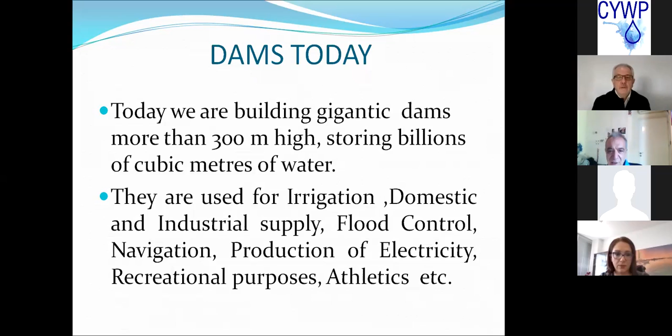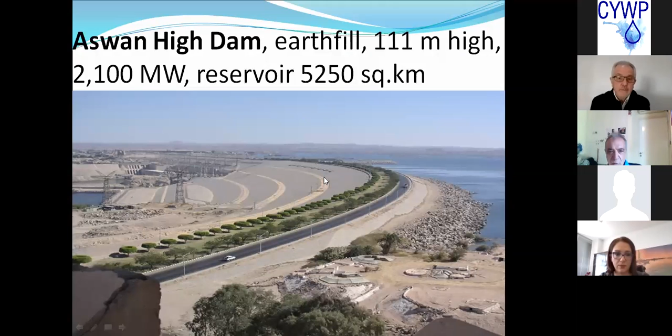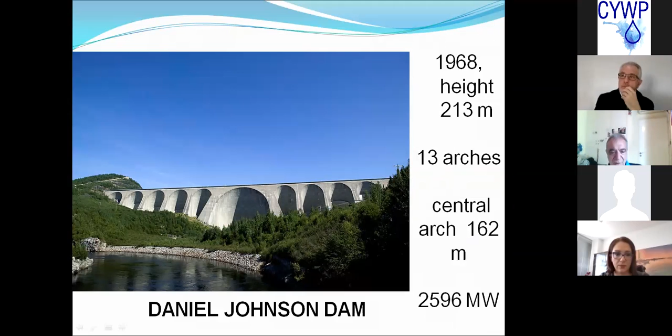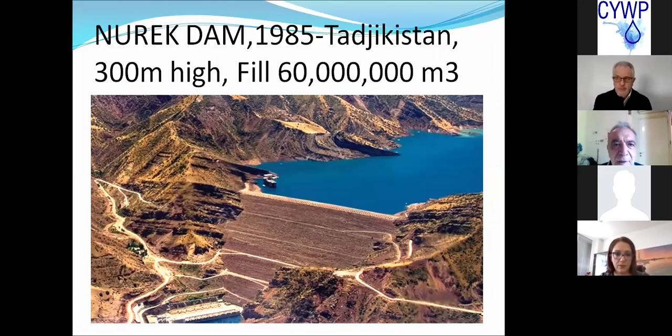This was the highest dam in the world for about 30 years, Nurek Dam, with a total fill of 60 million cubic meters. And this was surpassed by this dam here. I'm trying to get rid of some of these. This is Nurek Dam in Tajikistan, which is 300 meters high with a fill of 60 million cubic meters. This is, I've got a problem here with the screen.

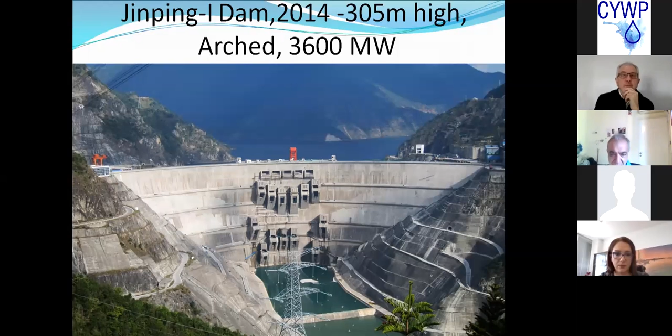Dam safety. As you understand, a large number of dams are located upstream of large cities, like the Aswan Dam, which is upstream of Cairo, and Folsom Dam, which is upstream of the city of Sacramento in California. So the safe operation of dams depends on many factors: design, construction, monitoring, maintenance. Dams do not become safer with time. We have a phrase in Cyprus that is wrong. The dam does not become safer with time, so it needs frequent inspection.

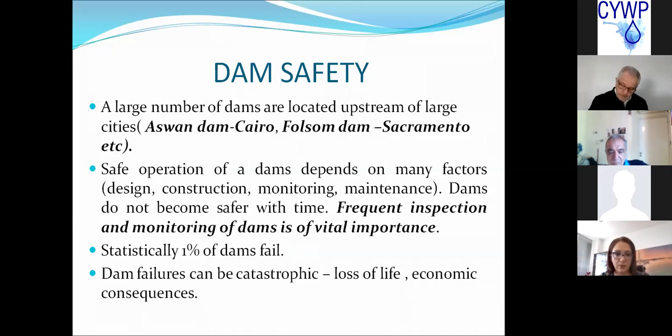Statistically, 1% of dams fail. Dam failures can be catastrophic, with loss of life and serious economic consequences. And I have a list of some dam failures here. The Malpasset Dam in France in 1959 killed 421 people. The Vajont Dam in Italy, 1963, killed 2,600 people.

The Canyon Lake, it's a very small dam in America, South Dakota, 1972. It was only 6 meters high, but it killed 242 people and destroyed half of the city. The famous Teton Dam failure in 1976. And we've got some really major dam failures in India and China. The Machchhu dam in India, approximately 5,000 people died, and 2 dams collapsed in China in 1975, killing 171,000 people.

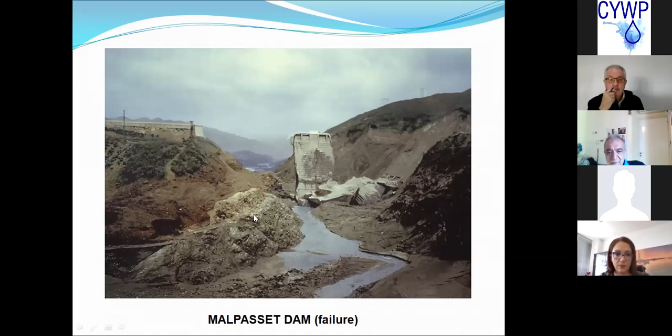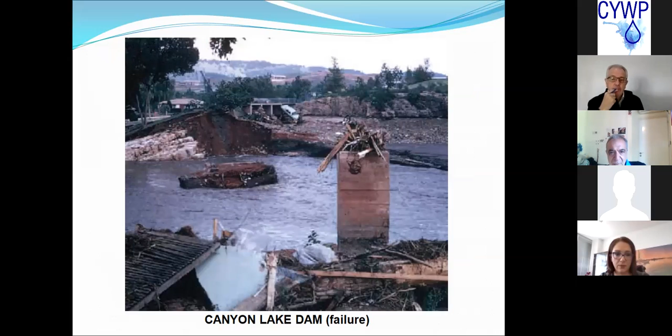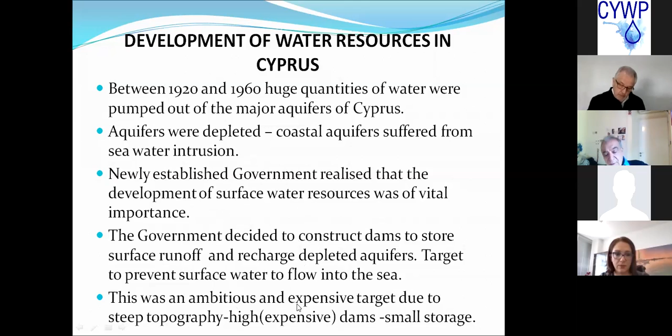Coming back to Cyprus, between 1920 and 1960, Cypriots were using the aquifers. They were pumping huge quantities of water from the aquifers. The aquifers were depleted. The coastal aquifers suffered from seawater intrusion. The newly established government realized that the development of surface water resources was of vital importance. The government decided to construct dams to store surface runoff and recharge depleted aquifers. The target was to prevent surface water from flowing into the sea. This was an ambitious and expensive target due to steep topography, because our dams are very high compared to their capacity.

In 1960, we had 6 small dams with a total capacity of 6 million cubic meters. In the early 60s, a number of medium-sized dams were built for irrigation purposes, and these were mainly earth-filled dams built with locally available materials, and these include Pomos, Agia Marina, and Argaka in the northwestern part of Cyprus, Mavrokolymbos in Paphos, and Polemidia upstream of the town of Limassol. They varied between 33 and 45 meters, and storage between 300,000 and 3.4 million cubic meters.

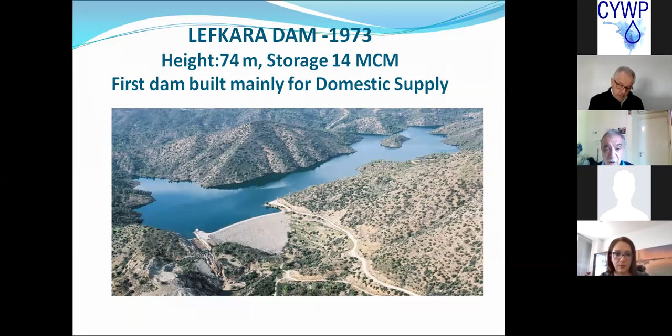This is the first dam with a capacity of more than 10 million cubic meters, the Germasogeia Dam. This is the first dam we built in Cyprus which was intended for the domestic supply of the city of Famagusta, the Lefkara Dam.

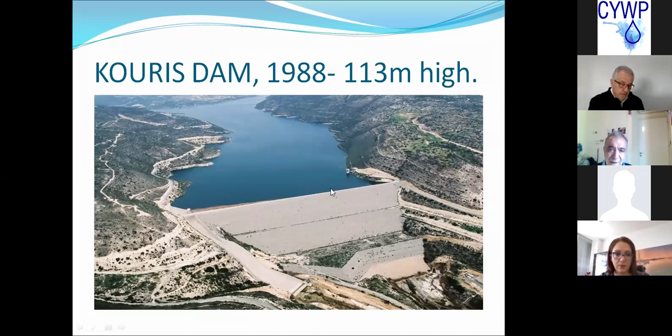And then after the invasion, the government decided to implement 5 major projects: Paphos Irrigation, Vasilikos Pentaschinos, Pitsilia Integrated Rural Development Project, Chrysochou Irrigation Project, and the Southern Conveyor. Obviously, large dams form the key components of those projects, and these include Asprokremmos Dam, Dipotamos, Kalavasos, Xyliatos, Evretou, Arminou, Kouris, Achna. This is the highest dam in Cyprus, with a height of 113 meters, capacity 115 million. This graph here shows the dam construction progress in Cyprus, and you can see that between 1980 and 1990, we've added 230 million cubic meters of capacity to our dams.

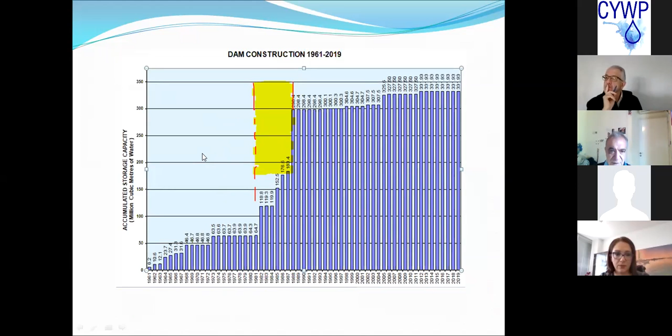Dam safety in Cyprus now. Most of the large dams in Cyprus belong to the Water Development Department, and some smaller dams belong to local irrigation divisions. Towards the end of the intense dam construction activity around 1990, it became obvious that systematic dam safety procedures had to be established. For many years, dam safety issues, inspections, instrumentation monitoring, etc., were addressed by the experienced engineers of WDD in collaboration with the consultants, because the consultants were mainly here, some of them finishing their projects, some of them not. So all this work was being carried out by the engineers of the Water Development Department.

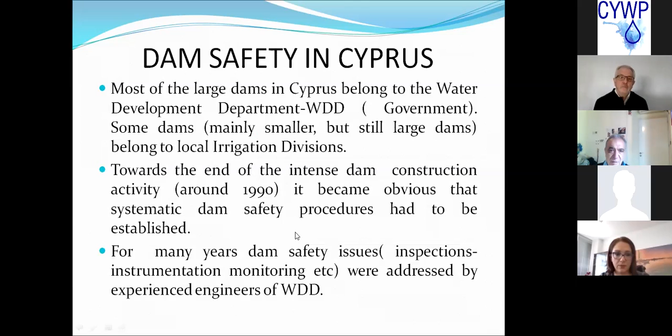So the Integrated Water Management Law, this is a law that was passed in 2010 after lengthy and laborious discussions, objections, and disagreements. There are provisions in the law for the safety of dams. We've got articles 56 to 79. These provisions are based on the Reservoirs Act of 1975 of the UK. Obviously, we have adapted the Reservoirs Act to suit the local conditions.

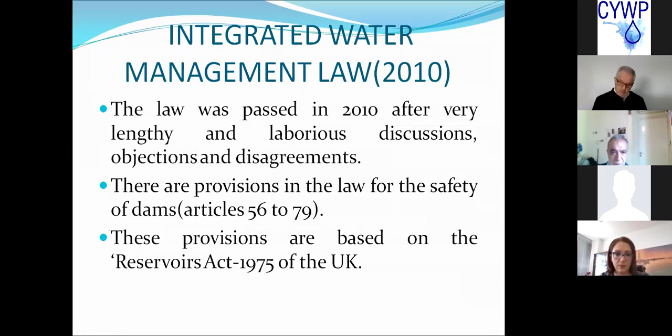So, similar to the UK Act, a large raised reservoir is a reservoir capable of storing more than 25,000 cubic meters of water above the natural ground level. The law covers all large raised reservoirs, whether constructed under the provisions of the law or not, i.e. those storing fresh water, recycled water, sewage, and liquid waste.

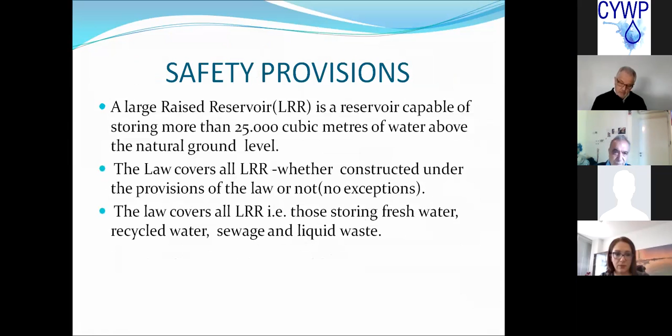The director of WDD ensures that all dam undertakers, those that are running the dams, including the director of the Water Development Department himself, comply with the provisions of the law. The director of WDD maintains a register of all large dams in Cyprus, with details about each dam, basically.

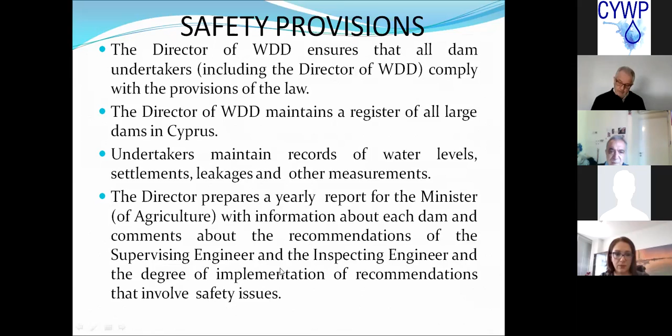Undertakers maintain records of water levels, settlements, leakages, and other instrumentation measurements. They keep proper records, which they have to communicate to the director of the Water Development Department. The director prepares a yearly report for the Minister of Agriculture with information about each dam and comments about the recommendations of the supervising engineer and the inspecting engineer, and the degree of implementation of the recommendations that involve safety issues. We will see in a minute what we mean by supervising engineer and inspecting engineer.

For this purpose, the ministry maintains a panel of qualified engineers, i.e. we've got 3 categories: the supervising engineers, the construction engineers, and the inspection engineers referees. The registration can be done by application to the director and approval of the Minister of Agriculture. Panel engineers must be employed for nearly all major activities involving dams.

In the case of construction of a dam, enlargement, reuse of a dam, a construction engineer must be employed for the design, supervision, and issue of certificates. This is very important. Not just do the design, but he has to supervise it and issue the appropriate certificates.

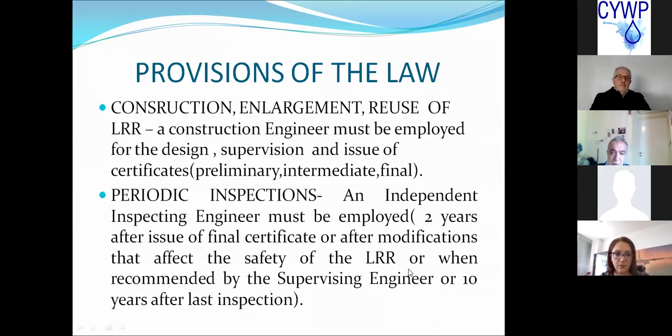Periodic inspections. An independent inspecting engineer must be employed 2 years after issue of the final certificate for every dam, and after modifications that affect the safety of the dam, or when recommended by the supervising engineer, or 10 years after the last inspection.

Supervision of a dam. When a dam is not under the responsibility of the construction engineer, in other words, it's finished, a supervising engineer must be employed to supervise the dam and give updated information to the undertakers regarding the behavior of the dam and the issues that may affect its safety, and ensure that they comply with the provisions of the law. They have to have somebody, a qualified engineer, to supervise the dam and go and visit them, check the instrumentation, and report to them whether there are any issues that involve safety.

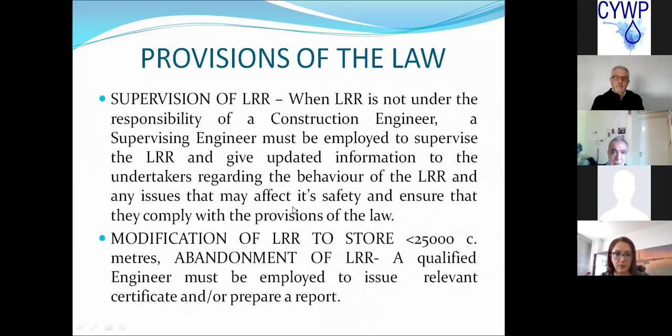If we modify a dam to store less than 25,000 cubic meters of water, or if we abandon a dam, a qualified engineer must be employed to issue the relevant certificate and/or prepare a report. The director of the Water Development Department has got some extraordinary powers. If the undertakers of a dam fail to employ a qualified engineer when instructed by the director under the provisions of the law, then a qualified engineer can be appointed by the director.

If the undertakers of a dam fail to implement a recommendation relating to the safety of the dam, the director may implement the recommendation by employing a qualified engineer himself. If the director considers that a dam is unsafe, he can take any appropriate action. All expenses are paid by the undertakers.

In case the undertakers, the users of the dam, in other words, disagree with the implementation of measures recommended by the supervising engineer, the inspecting engineer, an arbitrator must be appointed. In case of disagreement, the arbitrator can be appointed by the Council of Ministers. Reports by arbitrators, construction engineers, supervising engineers with recommendations must be communicated to the director.

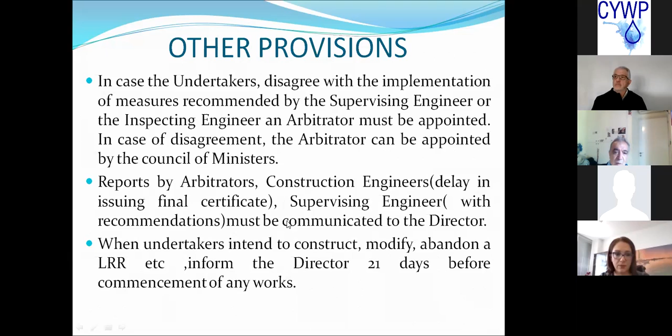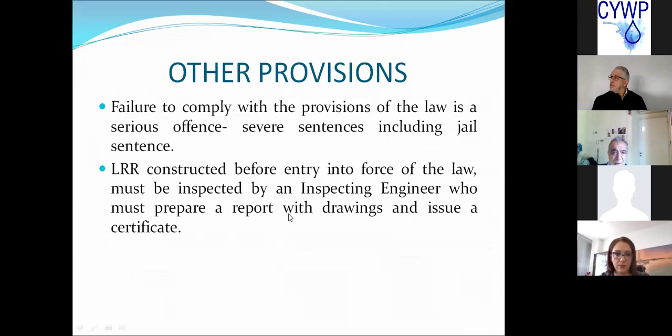When the undertakers intend to construct, modify, or abandon a dam, they inform the director 21 days before commencement of any works. Other provisions: failure to comply with the provisions of the law is a very serious offense, and there are severe sentences, including jail sentence. Dams constructed before entry into force of the law must be inspected by an inspecting engineer, who is going to prepare a report with drawings and issue a certificate.

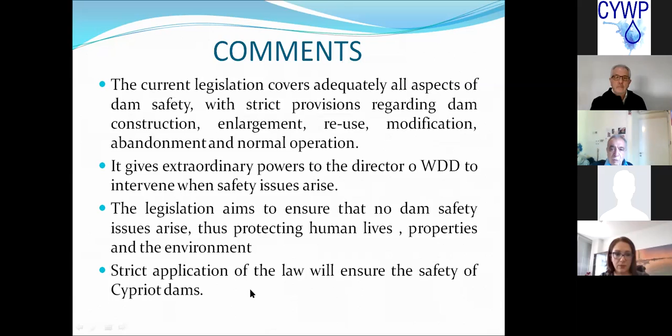My final comment is that the current legislation covers adequately all aspects of dam safety, with strict provisions regarding dam construction, enlargement, reuse, modification, abandonment, and normal operation. It gives extraordinary powers to the director of the Water Development Department to intervene when safety issues arise. The legislation aims to ensure that no dam safety issues arise, thus protecting human lives, properties, and the environment. Strict application of the law will ensure the safety of Cypriot dams.

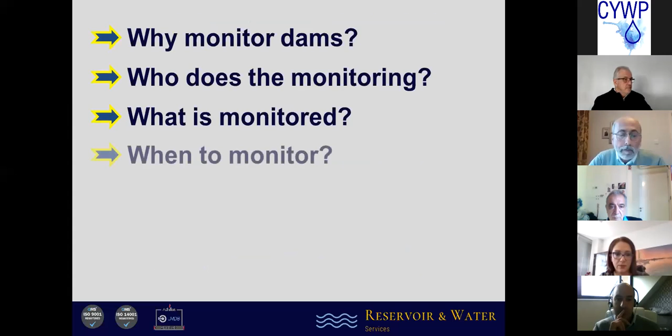But it's fair to say that each country's legislation differs slightly in some respect, but they all share a common ancestry that goes back to 1930, following a couple of major dam failures with loss of life. And they all have requirements that are very similar for the topics that we're going to cover in this presentation. We will cover these topics, and our aim is to illustrate typical monitoring practices here in the UK, who does that monitoring, and the legal framework that stipulates what needs to be done.

It might be useful quickly to provide a comparison of terminology between Cyprus and the UK. In England, the operator of a reservoir, which is not necessarily the owner of the reservoir, is termed the undertaker. I understand that you might also use the word operator as well as undertaker. I'm going to use both in this, just to avoid any doubt. They both mean the same thing.

You have 3 classes of engineer. Category 1 being the supervising engineer, category 2 being the construction engineer, and category 3 the inspecting engineer. In the UK, we have supervising engineers and inspecting engineers, but the inspecting engineer can also undertake the role of construction engineer, whereas the supervising engineer cannot.

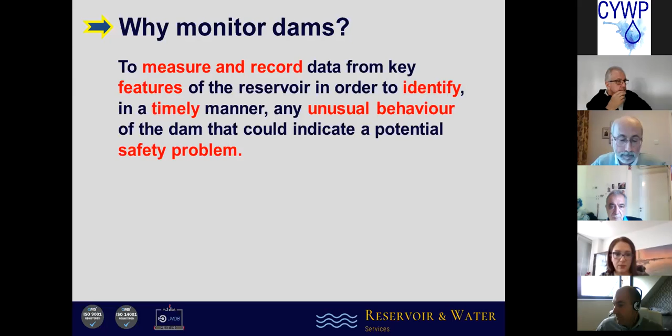So, getting into monitoring of dams and the equipment associated with the control and management of water into and out of the reservoir. This is vital to understanding whether the reservoir and equipment perform as expected and to provide long-term data that enable unusual trends in the behaviour of the dam to be identified in a timely manner to avoid safety problems, basically. It's a legal duty in the UK to perform monitoring and maintain records, and the same now applies in Cyprus. And this was touched upon in a previous paper.

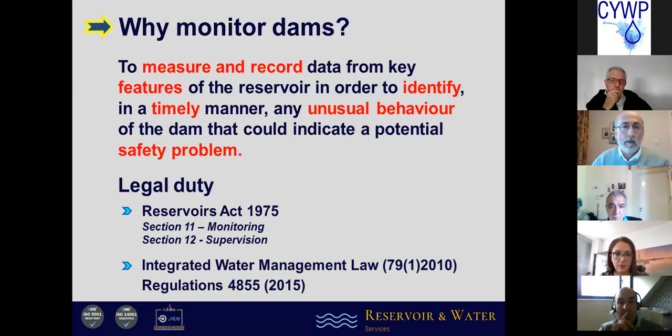Monitoring is performed by the reservoir undertaker. Some monitoring is conducted for operational purposes and also to record the performance of the structure of the dam and its fixtures such as valves, gates, weirs, etc.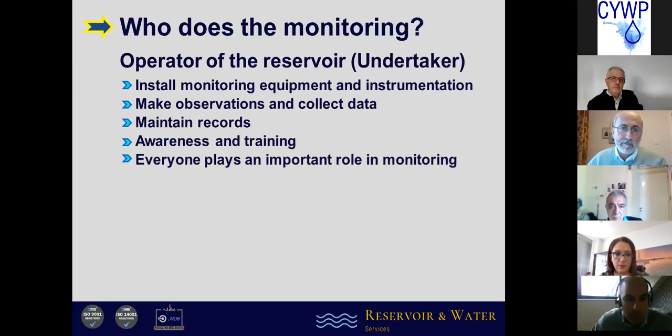The supervising engineer is obliged to ensure that the operator keeps records of the monitoring and also to assess the data from that monitoring to identify if there are any unexpected or unusual trends in the data. So, for example, has the dam settled more than would be expected from the design calculations? The supervising engineer is required to include a section in the annual report that is produced about the reservoir.

And about the operator's monitoring and an assessment of that data. That report has to be sent to both the reservoir operator and to the enforcement authority, which in England is undertaken by the Department for Environment, Food and Rural Affairs. Bit of a mouthful, normally called DEFRA. It's one of the major departments within the government.

They review the legal performance of the undertakers to make sure that they are complying with all of the regulations and they are not slow in using their enforcement powers to seek prosecution where things aren't done how they should be.

Recent change to the law in England has given a new power to supervising engineers, enabling them to issue instructions to the operators of reservoirs to conduct additional or new monitoring where it's believed that there could be an issue with the dam that might affect its safety and for which the monitoring is required.

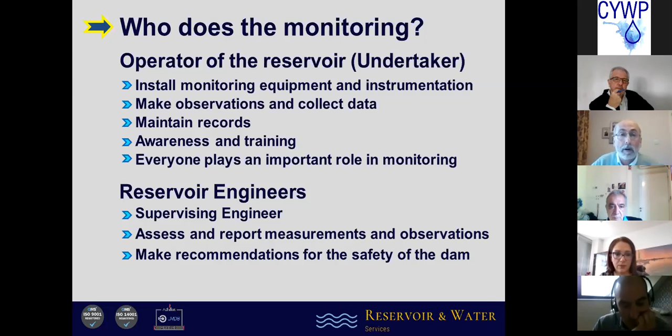The construction and inspecting engineers will usually recommend what is to be monitored and at what frequency. The operator of a dam has a legal duty to follow those instructions, as does the supervising engineer to review the data collected and to report upon it. The undertaker is often able to select the methods of monitoring and the equipment to be used.

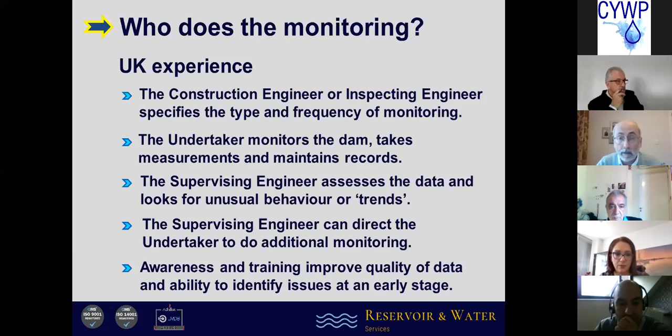In my experience as a supervising engineer, it is always a good idea to inform those who will actually do the monitoring why it and they are so important, as it is those people who will see the reservoir, the dam, more often than most other staff, and they provide an ideal means of observing anything unusual and then reporting it quickly to catch problems before they develop too far.

So, what is monitored? There are two main aspects of a reservoir where monitoring is required in relation to the safety of the dam. Things are associated with the water being stored and the dam itself and all its fittings. From a dam safety perspective, the normal parameters to be measured include the water level, discharge from the dam, as well as on occasions the inflow to it, although that is normally only used at non-impounding reservoirs where the water is pumped into the storage reservoir.

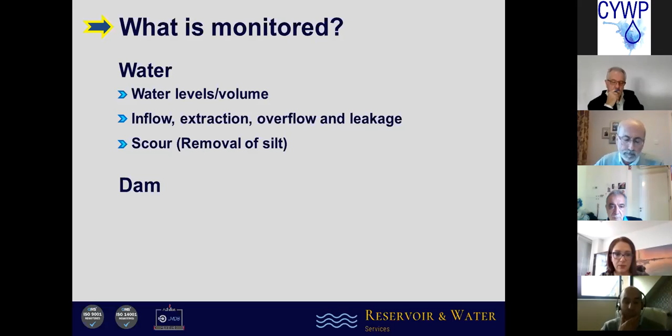The chemical and biological aspects of water are often measured, but these are normally only relevant for water quality purposes in water supply reservoirs and not so much used for dam safety purposes. In terms of monitoring the dam itself and its various elements, the monitoring normally focuses on movement and condition. Has anything moved more than expected? Typically settlement or deformation of embankments? Is the condition of fittings adequate and do they operate as required? Absolutely critical, that one. Different methods are employed to monitor each of these, and we shall now explore some of the more typical methods that are used in the UK.

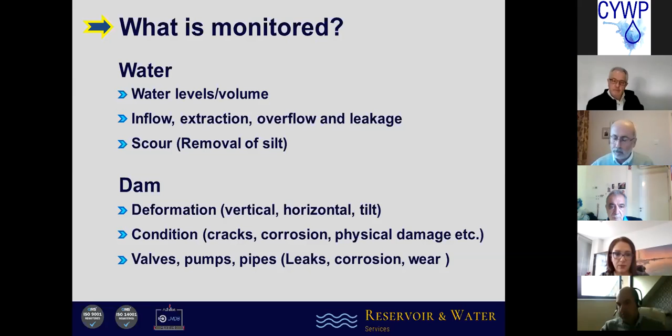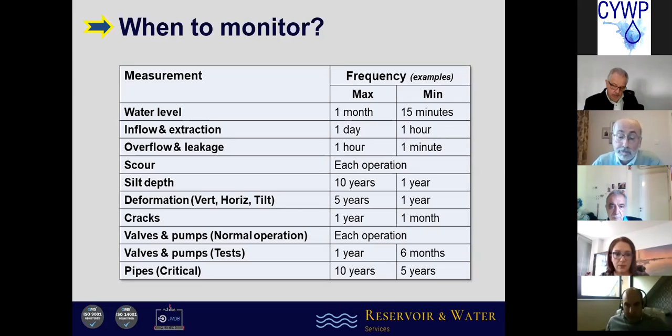It's often possible to reduce the frequency of monitoring after a dam is built or altered when its performance has been shown to follow predictable trends, but equally importantly, to increase those frequencies when unusual trends are observed.

We're getting on to how we conduct monitoring here in the UK. Looking at some of the typical measurements and starting with water level, the three common methods used include visual observations using a gauge board, which obviously needs somebody to go and have a look at it, or using digital methods. The typical ones we use are ultrasonic methods made from above the water by reflecting a signal off the water surface to measure the distance down to the water, or by using submerged pressure sensors under the water that measure the depth of water above the sensor.

The advantage with the digital methods is that they can be linked via telemetry and have automatic alarms included within that telemetry so that notifications are sent to key personnel advising them of sudden or unexpected rises or drops in water level.

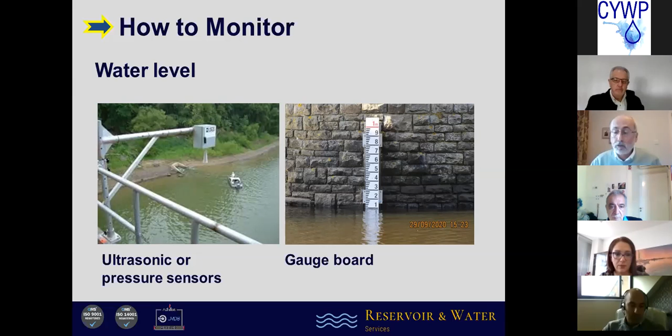Another very common and growing practice in monitoring is the use of remote CCTV, again linked by telemetry, with cameras provided to look at key components of the dam: valves, weirs, spillways, etc. These need to operate 24 hours a day, and having an infrared lighting facility built in is a very useful

feature to include. One interesting recent development on that is if you are using infrared, just remember it cannot see anything that is red. So don't paint valve handles or have red numbers on your gauge boards because it can't see them. Black is good, or any dark colour. But be aware, these can be prone to vandal damage, and we also suffer from the mess that birds tend to leave on them. They like to perch on these things.

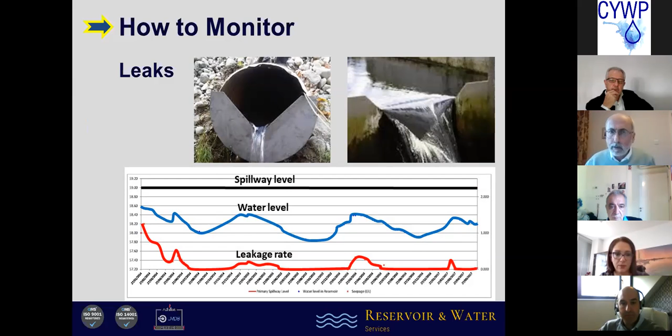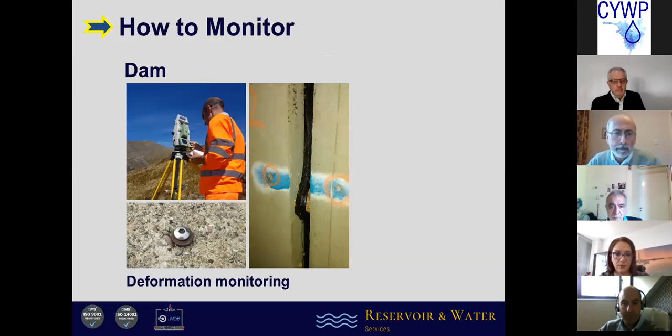Monitoring movement of the dam or its deformation requires precision measurements. The frequency of those measurements can vary, as I've mentioned before. It's normal practice here to measure the deformation of dams every 2 or 3 years, sometimes less than that, using permanent reference stations, such as the pin that you can see in that bottom left image, fixed to key components of the dam and its structures.

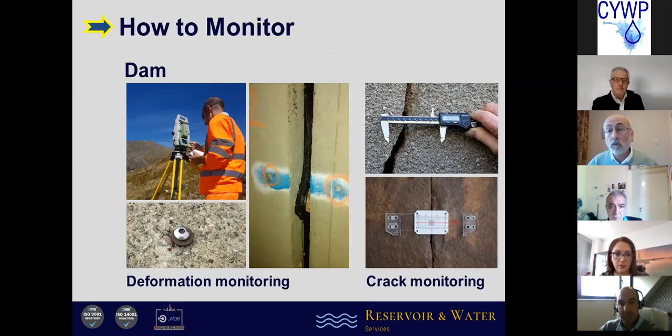Crack monitoring is usually conducted more frequently. Measurements will be made even more frequently when any unexpected movement occurs. Cracks can widen and close up. Again, the longer term monitoring will show whether or not this is normal or exceptional behaviour.

It's a duty of the supervising engineer to assess the monitoring data to see if there has been an unexpected trend in the data. The undertaker can do this as well for their own benefit, but the duty rests with the supervising engineer to make that assessment and to assist the undertaker in understanding what is going on with their dam.

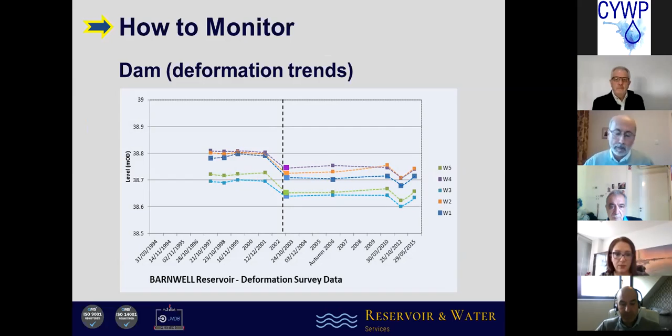Settlement of embankment dams is nearly always monitored due to expected consolidation and settlement. They will be expected to settle, but heave or rebound, as we call it, can occur with fluctuating water level. So having a long-term data set of monitoring measurements becomes important in being able to differentiate between these and any unexpected movements.

Siltation is a problem in many reservoirs, and the operation of scour valves to flush away silt where it's collected behind the dam is nearly always recommended by inspecting engineers to be conducted typically at least once every year. So the valve is operated over its full range until water runs clear and the silt around the valve has been flushed away.

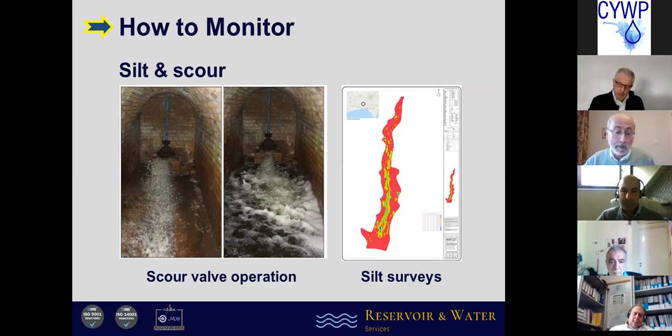Monitoring where silt has been deposited is becoming more commonplace as dams get older and more silt is being brought into the reservoir, as this reduces the volume of stored water, which can have economic or supply consequences. Different methods can be used to measure the silt, which Tom will touch on now as I hand over to him to look at some of the practical monitoring methods that we commonly see across the UK. Over to you, Tom. Thanks, Neil.

Neil's covered some of the importance of monitoring, and now I thought it would be good to cover how we complete some of these tasks and the type of surveys that we actually undertake. Many people will be familiar with traditional topographical surveys, which provide accurate 3D points, plotting the location of the features based on individual survey points. For large areas now, we can use UAVs or drones to capture a much higher density of data, and to be honest, in a fraction of the time. This will create a ground terrain model and can be used for more than just standard topographical surveys.

Neil mentioned deformation monitoring. These surveys are typically used for monitoring movement of structures such as dam crests, walls or tunnels. Monitoring is repeated at regular intervals and is achieved using precise total stations or digital levels, all referenced back to known static benchmark readings. Typically, sub-millimeter measurements are required, and it's certainly achievable when undertaken in the correct way. Next slide, Neil.

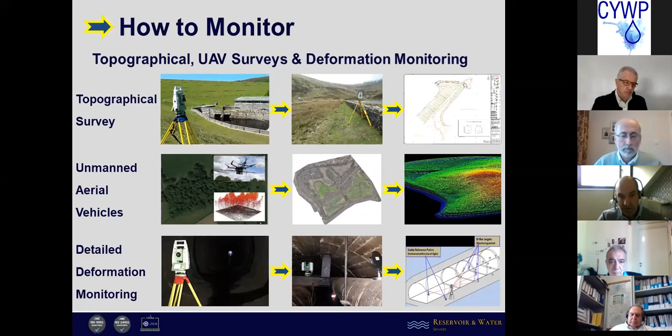A great way to capture a full three-dimensional profile of a structure is to complete what we do, the 3D point cloud surveys known as 3D laser scans. These also provide high definition, 360-degree photos throughout the survey. With very tight data registration, accuracies of between 3 to 4 mil are certainly achievable in this type of survey. And this survey is typically used to provide a full record of valves, pipework, connections, cracks, displacements.

Once scanned, any measurement and photographic evidence can be taken, and if needed, repetitive surveys can be completed to monitor any change. 3D point cloud surveys are fantastic and regularly used prior to starting any projects where engineers can visualize all aspects of the structure. They can take measurements of everything or anything, including very small detail like the size of bolts, which can aid the design process.

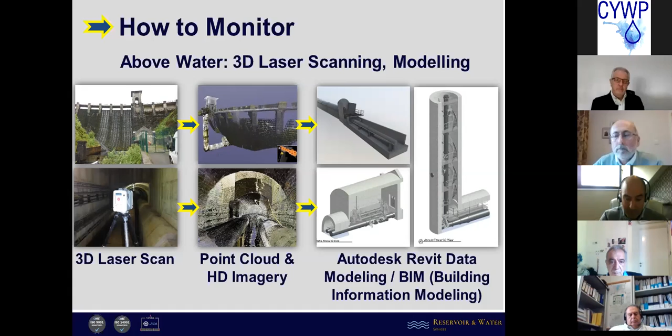The pictures on the right contain sections from model data. This is often known as BIM or Building Information Modeling, which provides a very easy visual means to view the data from the point cloud dataset. Right, now moving on to our more sort of favourite type of surveys.

This equipment can be put on board a boat or attached to even remote control boats, and requires a lot of backwards and forwards movements across the water to build up a full picture of the bed profile. Detailed contour drawings of bed levels and top of silt, etc. can be provided, which then give you quantities of silt and water at different depths.

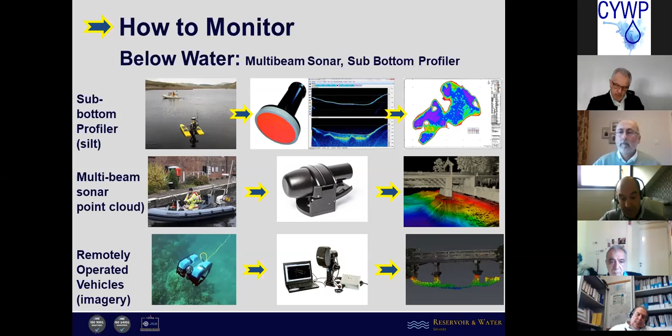Neil, I'll pass it back to you now. Thank you, Tom.

Our legislation in the UK is supplemented by a guide in which the legal content and the recommended format of the records is recorded. This is to give the undertaker of the reservoir the means by which to actually collect and then store those measurements that are to be legally gathered and retained, and then assessed by the supervising engineer.

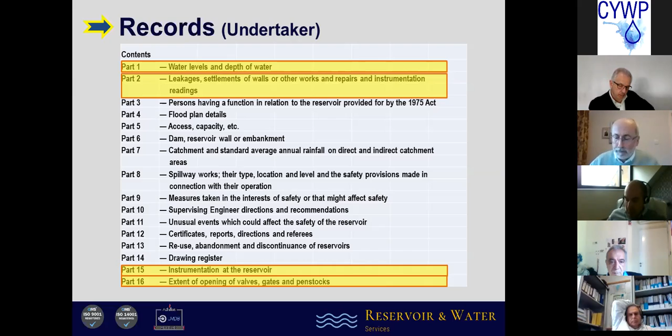The guide also describes the prescribed contents of this annual report by the supervising engineer, the 10-yearly report by the inspecting engineer, and the certificates to be issued by the inspecting and construction engineers. So it's a very useful guide, very comprehensive, and it's revised at fairly regular intervals.

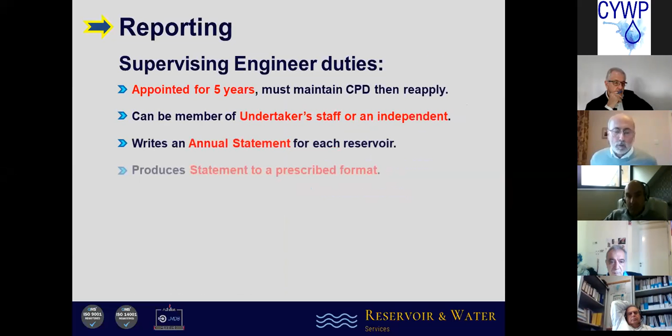The supervising engineer has to satisfy specific requirements before qualification. But I'm moving on here to explain how the supervising engineer's role in monitoring the data is critical, and how selection and approval of supervising engineers needs to include evidence from the applicants that they fully appreciate how monitoring is such a vital role of their future duties.

They have to satisfy specific requirements before qualification onto the panel of supervising engineers. And once they qualify, unlike a doctor who's a doctor for life, a supervising engineer only has a 5-year period of qualification before they then need to reapply. They have various legal duties when appointed to supervise the reservoir.

The appointment to look after a reservoir is made by the undertaker, and the undertaker can select anyone from that approved panel of supervising engineers, but normally makes the selection based on the engineer's familiarity with the type of dam. So somebody who has no experience of concrete arch dams would not be chosen. Conversely, somebody who has no idea about earth embankment dams would not be selected to look at an earth dam.

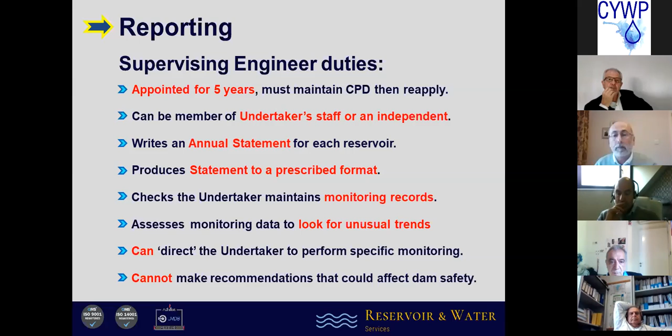They're also chosen on their proximity to where the dam is, in case there are incidents, and the time that it takes for them to get there. As an illustration, an inspecting engineer, which can also be the construction engineer here in the UK, has more legal authority than the supervising engineer, but again is very focused on the monitoring aspect of their duty. But as with the supervising engineer, also only has a 5-year period before needing to reapply.

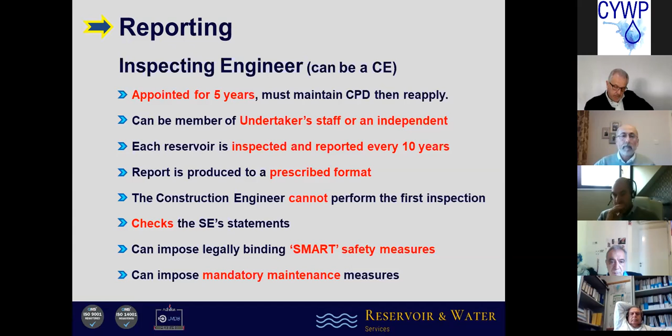So that concludes this presentation. I hope that's been of use, and I understand we'll now go into a period of any questions. Thank you. Many thanks, Neil and Tom, for this extremely detailed and valuable presentation with regard to effective monitoring and the legislative framework that is applied in the UK.

Any questions at the moment? I don't see any questions in the chat box. So, Neil, during your presentation I made some notes, and perhaps I would ask to start with emergency plans in the case of an incident. Is it the responsibility of the operator, or in the case of the UK, the undertaker, to prepare this, and do these plans have to be approved by some authority?

Very good and very timely question, Boss. The next presentation will actually touch on some of the problems that can occur, and probably most of you, if not everybody involved in the webinar, might be familiar with a fairly major incident that happened here in the UK last year at the Toddbrook Reservoir. Probably very familiar and memorable because of the use of Chinook helicopters to deliver big bags of ballast to try and support a failing spillway.

When a reservoir is constructed, the construction engineer who oversees the design and the construction phases issues certificates, as is the case over on Cyprus. And what is common practice here is at the end of that period, what's called an operation and maintenance manual is also created, normally by the designer of the dam. And this is for use specifically by the undertaker, by the operator of the reservoir going forwards.

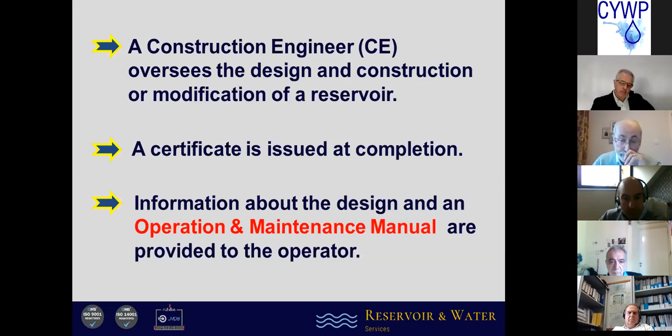It gives details of the ways in which the reservoir should be operated, the equipment involved, so all the valves, weirs, etc., and how the dam and all the equipment should be maintained until such time as the inspecting engineer comes along, 2 years after the dam is built, and then at 10 yearly intervals, when they can issue additional recommendations or advice as regards operational maintenance and monitoring to be undertaken.

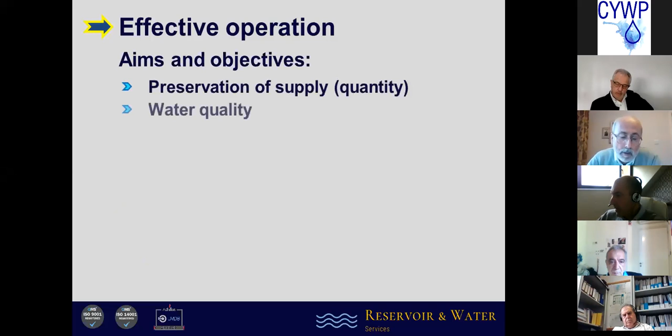Effective operation of a reservoir should be ensured by detailed written instructions and procedures put into effect by staff who are well trained. Those are very good aims and objectives seen here. The procedures normally cover actions that are designed to ensure that the reservoir can supply the required quantity of water of a suitable quality for treatment and then distribution, or for irrigation purposes.

It's fair to say we also have many reservoirs in the UK that we call amenity reservoirs, which were usually built to improve the appearance of large country estates. People who had more money than they knew what to do with and wanted to look out of the windows at something that looked very good. These have their own particular problems, and their operators don't always devote sufficient effort to their maintenance.

We also have a great number of what are called flood storage reservoirs that are normally empty, but can fill very rapidly in storm conditions and are designed to protect property or critical assets downstream. These have slightly different operating procedures, and the staff involved with operating them need special training.

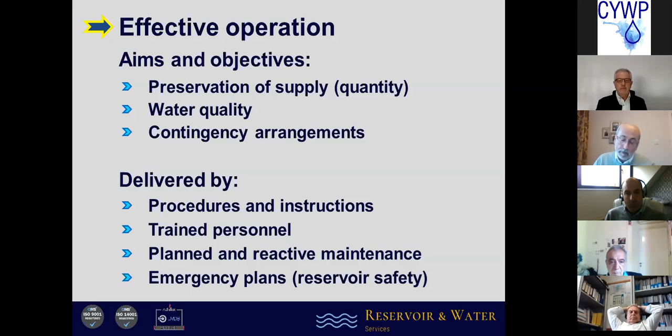The plans, as I've just mentioned, describe what actions should be put into place to operate the reservoir to try and mitigate damage and the catastrophic release of water through the dam. And these can be tested with the supervising engineer to prepare the undertaker's staff in advance of a real event and to identify gaps or omissions in the procedures.

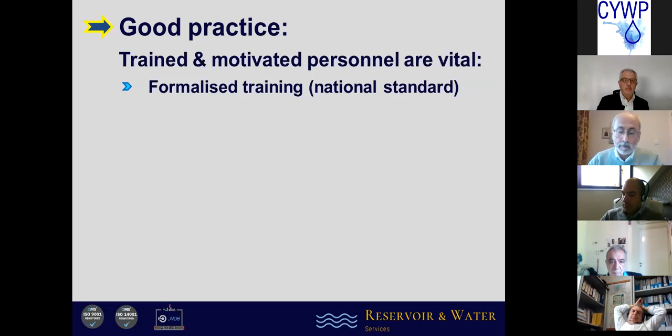So looking at what do we consider to be good practice? Training of the staff that operate reservoirs is something that is, in my opinion, not given the priority it requires. I've found that well-informed staff, when they do get training and time is taken to involve them in how the reservoir operates and what it's for, they take pride in their work. Once they appreciate how important their role is, it makes them feel better and trusted and valued by their employer.

One way to do this that I've found definitely works is to provide awareness sessions to staff who undertake completely different roles, whether they're key high-level management, right the way down to the guy that greases the valves and takes the readings from monitoring equipment. Everybody is important and plays vital roles, and understanding where they fit within that structure should not be overlooked.

Having written procedures on how to operate the reservoir, as I've already mentioned, is very important. Defining roles and responsibilities for everybody involved in that process is also essential, and they are made more effective when those procedures are reviewed regularly. It's no use having them in a folder kept on a shelf collecting dust. They've got to be looked at on a very frequent basis.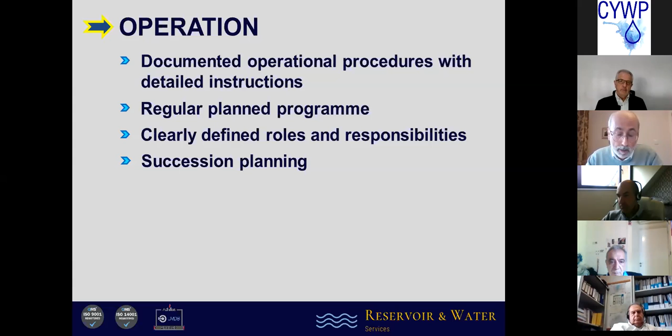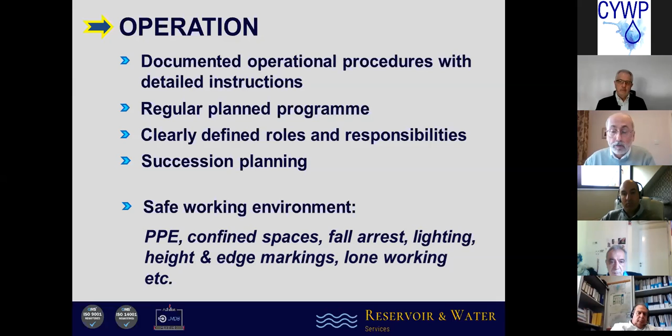And something we take very seriously is provision of safe working environments with attention to the details described here, which help to reduce accidents, but also raise morale and productivity, and should never be overlooked. We have many forms of legislation here looking specifically at health and safety, and they all relate to reservoir work, and some specifically, such as confined spaces going inside dams, are very robustly enforced over here.

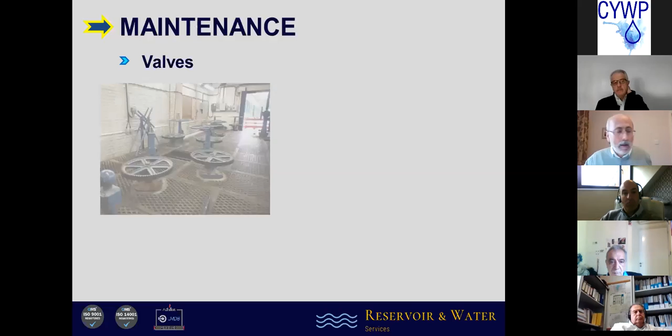Looking at some of the key components and how to operate and maintain them: valves. Valves need a lot of attention to make sure they continue to operate properly. They're highly stressed assets working in a hostile environment and need regular operation to keep them working properly. Manually operated valves and electrically operated. You can see on top of the two valves on the right, square valves, we call them Rotorks. They are electrically driven motors that raise or lower the valves.

And I don't think I need to say how the valve in the middle is operated, it speaks for itself. All of them require the same level of attention in operating them and maintaining them, because those valves have all got to do the same job. Well, you have check valves or guard valves that are only operated once in a while when the valve that is normally used is taken out of operation for maintenance. If that check valve doesn't work, then there's no way of working on the normal valve.

Personally, I found that the addition of a very simple sign to a valve stating its purpose, which way to turn it to open or close it, and the number of turns required to fully open and close the valve is a very useful addition and helps those who need to operate the valve, particularly if they're not that familiar with the valve and are called in at short notice to go and open or close it.

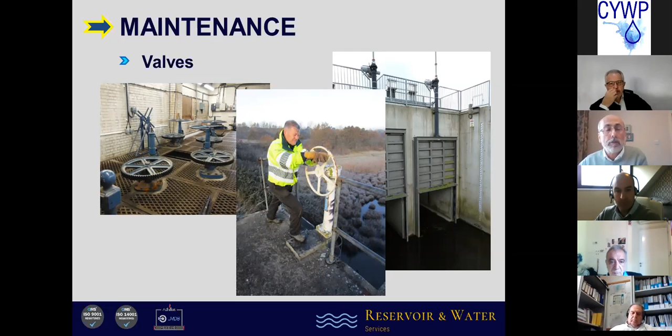Cables on winches all need to be unwound and checked for defects, and again lubricated with grease. All electric motors and pumps should be tested. Gates, sluices and valves should all be operated over their full range at least once every year.

Spillways. Spillways, and in particular the joints in spillways, have received a lot of attention, as I mentioned earlier in response to Bambus's question, particularly following the event last year at the Toddbrook Reservoir. In fact, you'll see a photograph shortly of just what can go wrong if things such as vegetation are allowed to grow in those joints.

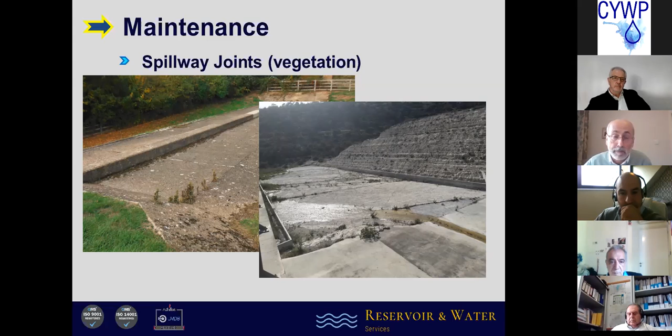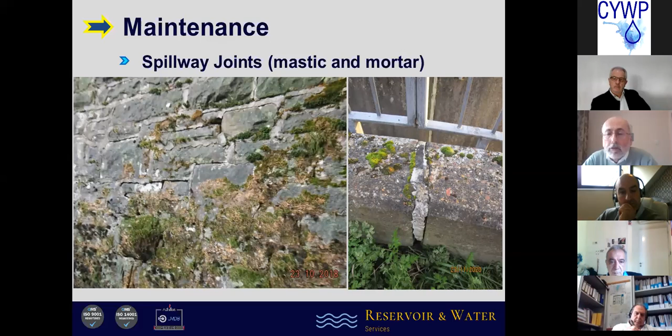Similarly, repair of defective sealant and mortar joints in walls and panels is recognised as being of great importance here. The wall on the left is a spillway wall. You can see the horizontal and vertical cracking between the masonry, and on the right is a mastic joint in a channel wall, which if you put your finger under that white mastic, you can simply pull that out with no effort at all. Just imagine the damage that water could do in there.

The force of water in a spillway should not be underestimated. We get a lot of rain over here, as you know, and conversely, I know you don't get that much. But when a spillway operates, all hell can break loose. Water will do what it wants to do. It takes no prisoners. Like an airbag in a car, the spillway needs to operate properly the first time of asking. And it's got to operate in extreme conditions.

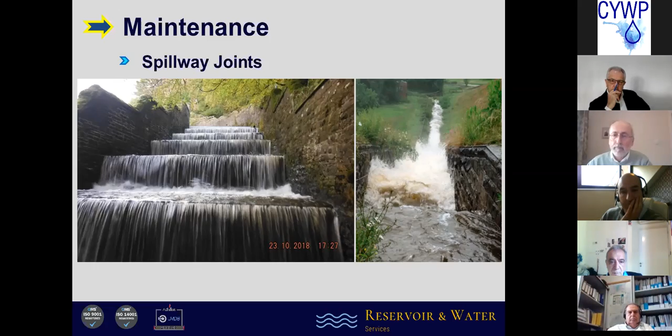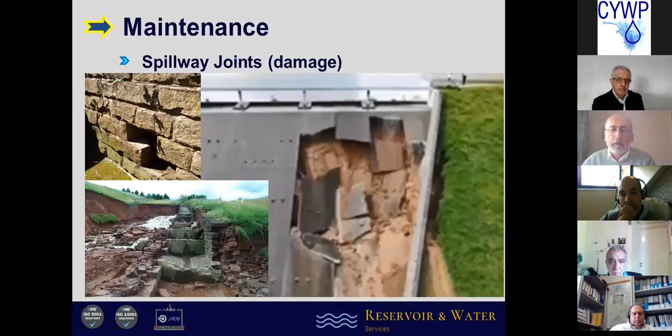We also have reservoirs where you have a membrane, typically on top of an earth embankment for irrigation reservoirs, where a plastic liner is used. It's relatively quick, simple, and cheap to deploy, particularly where clay or asphalt or concrete is not readily available. But these have different problems: holes, punctures, and where plastic sheeting is welded together, those welds can come apart over time. Holes and tears need to be repaired quickly.

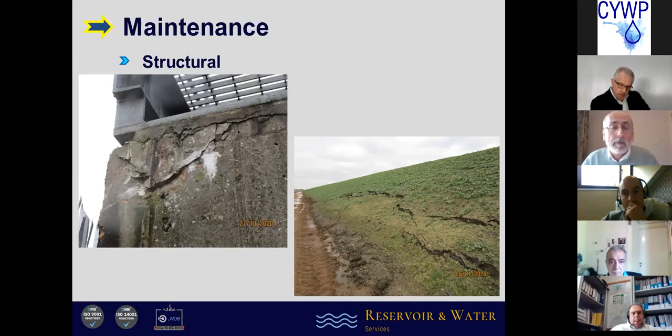Concrete will degrade over time, so we have to keep looking at it, monitoring its condition, as I said earlier, and repairing it before the cost of repairs becomes exorbitant because we've let the problem develop too far.

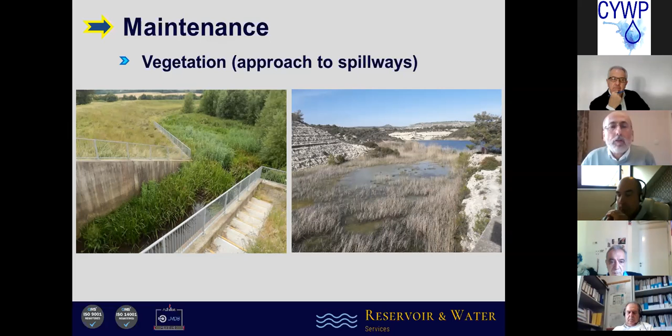Getting rid of the vegetation is important to make sure the water can flow freely. If you don't, that vegetation will be lifted and moved by fast flowing water and can easily cause blockages downstream. So we've got to look at and ensure that any vegetation is effectively controlled.

Big trees have big roots. Big roots try to find water. The water's in the reservoir, the roots try to find their way through the dam to the water. Not good. So controlling the growth of trees and other vegetation on a dam is very important.

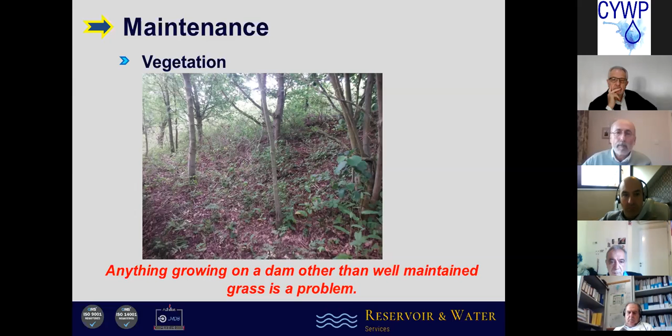It's also a legal requirement to maintain records of the operation of certain parts of the dam, as I mentioned before, with monitoring. Similarly, the extent of operating of valves, again, going back to the last part of the official register for every dam, in part 16 is a legal requirement that every time a valve, a gate or a penstock is operated, it must be entered into the record book.

And many undertakers here also choose to add additional parts to the record book for their own benefit to record when they operate other parts of the reservoir. Aerators or diffusers to try and rotate the water and improve its quality. They are recorded as well.

Something I would like to just insert here, if I may, Bambos, which is slightly in addition to the copy of the presentation I've sent you, is I'd like to refer you to the British Dam Society website, because it has an excellent library of reference documents on it that focus on monitoring, operation and maintenance, as well as many other things too that are of great use as background reading and for providing experience of engineers, both in the UK and internationally.